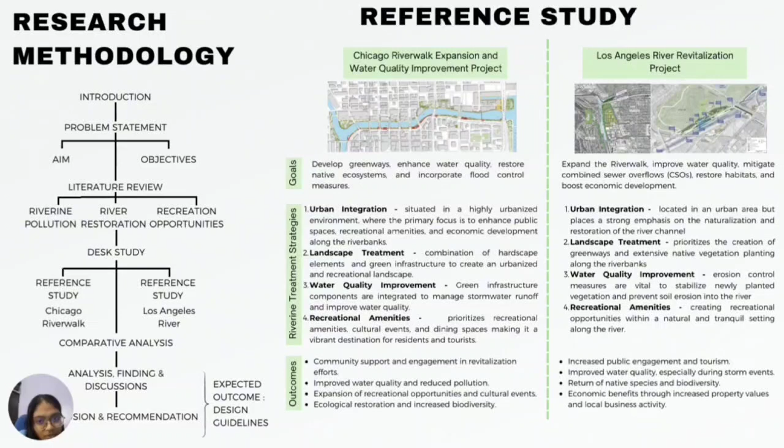These are the research methodology and reference studies, which cover the Chicago Riverwalk expansion and the Los Angeles River revitalization.

The proposed site, Sungai Lumut Kanan, is a stream located in Lumut, Perak, Malaysia. Its estimated terrain elevation above sea level is 12 meters, and it flows through the Mangrove City Park into the residential area of Vista Perak.

There are a few site issues covering environmental, social, and awareness aspects: water quality is declining due to pollution from industrial activity, agriculture, and waste disposal.

There is also a lack of recreational facilities along Sungai Lumut Kanan, preventing the local community from fully engaging with the river and its surroundings. The river is also being polluted by industrial and agricultural activities without proper supervision.

There are a few efforts taken to tackle the problem by residents and the municipal council, such as gotong-royong activities and garbage trap installation.

This is the site context, within which there is the mangrove park, the river, agricultural activities such as shrimp ponds, and the residential area.

For the hydrology and water quality within the site, there are two types of pollution: point source pollution and non-point source pollution. Point source pollution comes from industrial sources, while non-point source pollution comes from roads, residential areas, and agriculture.

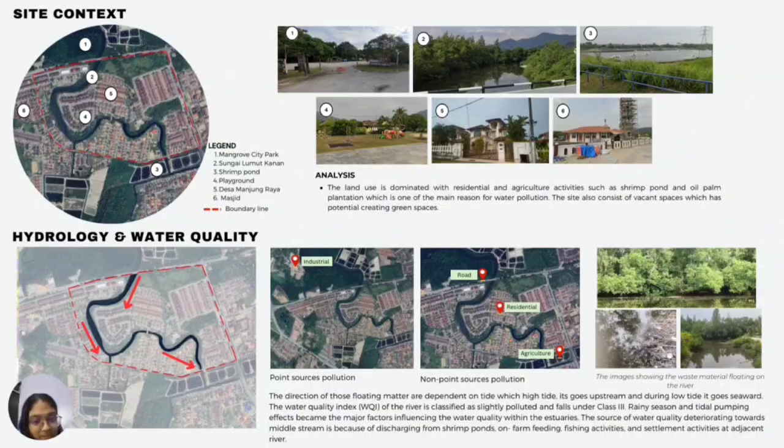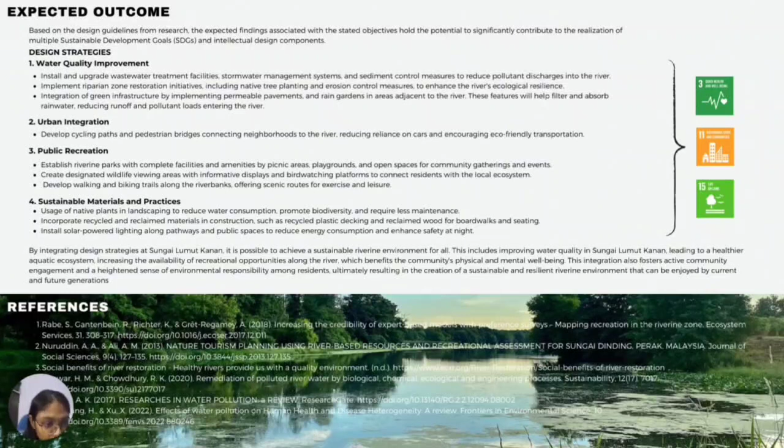Based on the design guidelines from the research, the expected findings are through water quality improvement, urban integration, public recreation, and sustainable materials and practices.

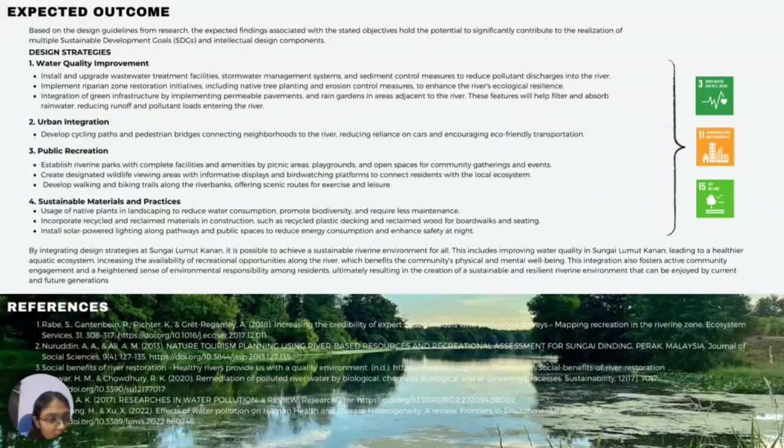By integrating these design strategies at Sungai Lumut Kanan, it is possible to achieve a sustainable riverine environment for all, which includes improving water quality, leading to a healthier ecosystem, and increasing the availability of recreational opportunities along the river.

For the second proposal, titled Landscape Planning Using Carbon Neutral Design Approach to Minimize Carbon Footprint in Manjung, Perak: the carbon neutral design approach is a strategic framework aimed at minimizing the carbon footprint associated with landscape design by employing sustainable practices, materials, and technology.

This approach seeks to achieve a balance between emissions produced during construction and carbon sequestration and offset measures integrated into the landscape design. Issues and problems found are that current landscape designs are contributing to carbon emissions rather than storage, and there is a lack of implementation of sustainable design guidelines for carbon reduction.

There is a need to implement and adopt landscape-based carbon reduction strategies.

The aim for this proposal is to reduce carbon footprint by integrating a carbon neutral design approach into landscape planning.

The objectives are to assess current landscape elements and practices, to identify carbon intensive components and develop strategies for eco-friendly alternatives, to raise public awareness on carbon sequestration by revitalizing urban space, and to integrate green infrastructure into city planning for emission reduction.

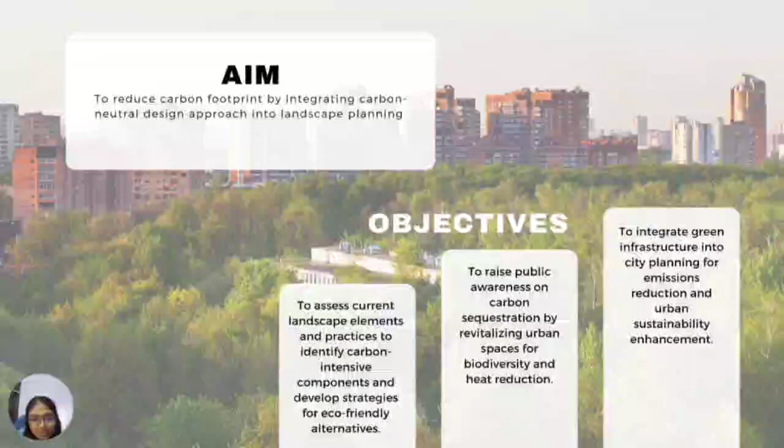The scope of the study covers carbon footprint, which involves assessing the total amount of greenhouse gases emitted directly or indirectly by an individual, organization, product, or activity.

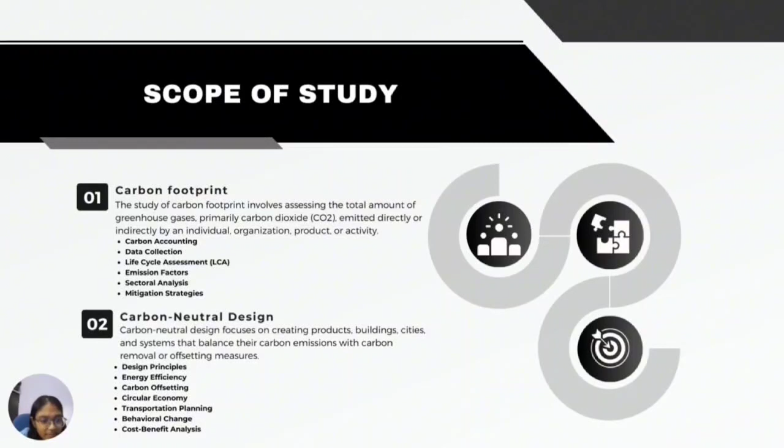It also covers carbon neutral design, which focuses on creating products, buildings, cities, and systems that balance their carbon emissions with carbon removal or offsetting measures.

The literature review covers key reasons for the increase in carbon, the impact of carbon footprint in landscape, ways to achieve carbon neutral design in landscape design, and the challenges and barriers in achieving carbon neutral design.

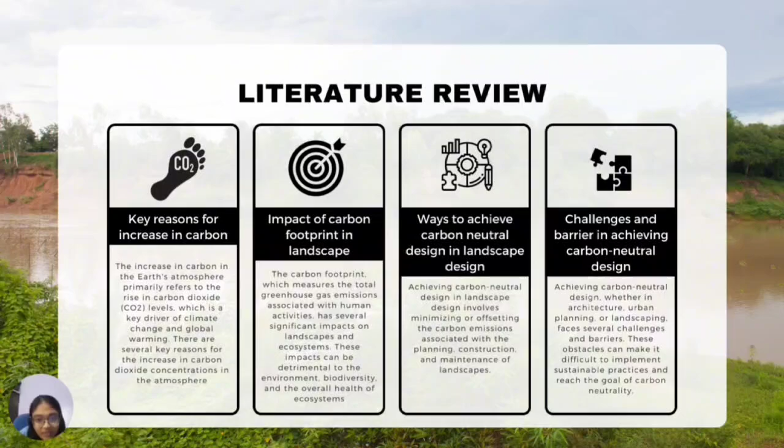These are the research methodology and reference studies, which cover the Highline in New York and Gardens by the Bay in Singapore. The proposed site, Manjung Point, is located at Sri Manjung, Perak, which is the district's principal urban center.

This is the user profile based on the RSN structure, RSN Negeri Perak, which shows the rising population in Manjung, Perak. There are a few site issues covering environmental awareness and social aspects.

There is a lack of green infrastructure and unutilized leftover and abandoned spaces within the city, and landscape design overlooks its potential in mitigating carbon emissions.

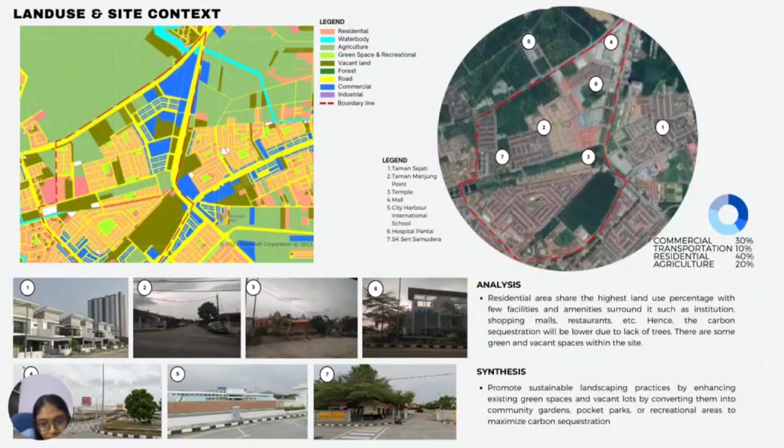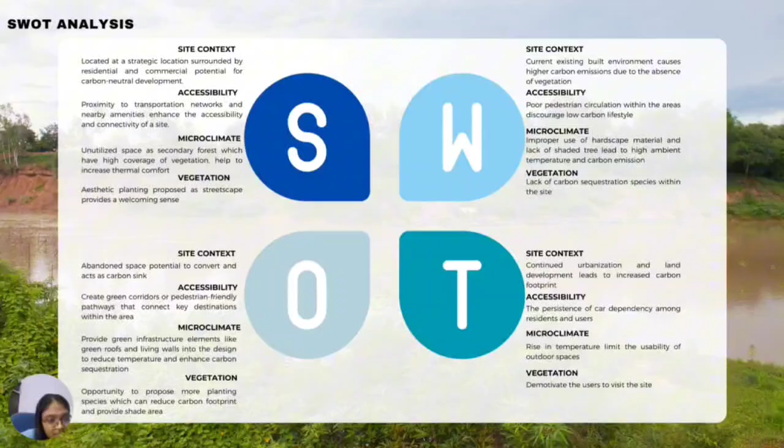These are the SWOT analyses which cover site context, accessibility, microclimate, and vegetation, which affect the carbon emission within the site.

These are the expected outcomes for this proposal, following design strategies such as native planting and carbon sequestration, carbon smart planting and maintenance, renewable energy integration, sustainable material and low impact design, and integrating green infrastructure into the site.

By integrating these design strategies at Manjung Point, it is possible to achieve a carbon neutral landscape design approach in Manjung Point. This approach also increases community awareness and involvement in carbon reduction and sustainable living.